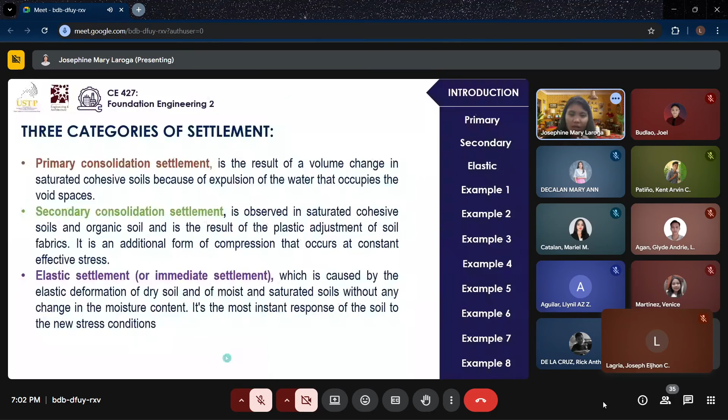Next is we have total settlement.

Naligo man ko. Ay, wala di ko napalit sampo. Sige, kanina ko... wait lang, wait. Hello? Kinsa tong gusto mo? Kaka-off mic na ako, sige lang. Naligo pati nga ay funny man eh. Padayon ta.

Anyways, so total settlement, from the term total settlement. Total, so the total na tanan settlements. So itong kaganina na mga settlements mo, it happens in different stages.

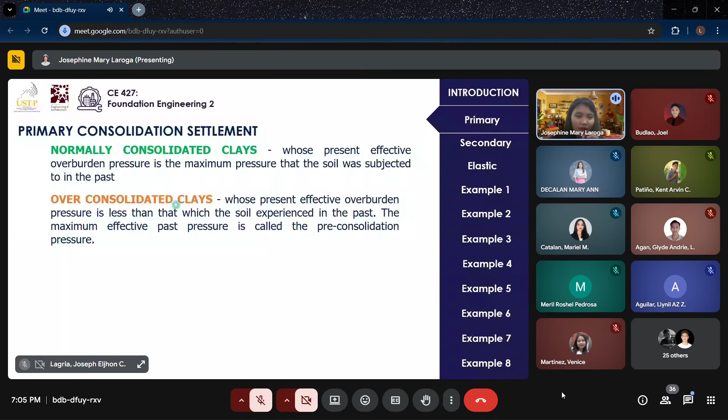Anyways, over consolidated clays. These are those that the present effective overburden pressure is less than which the soil experienced in the past. The maximum effective past pressure is called the pre-consolidation pressure.

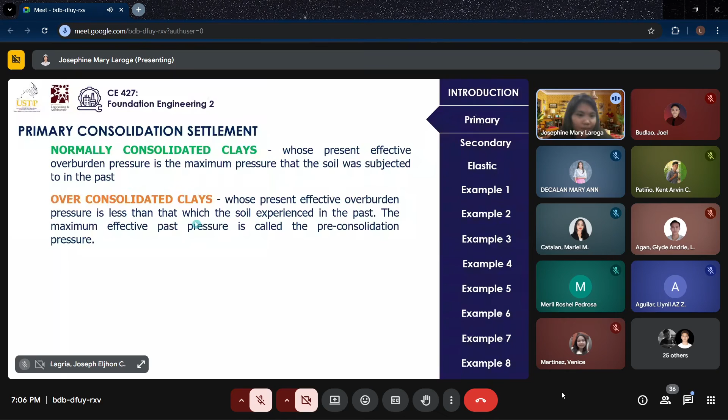So here are some examples we need to familiarize. We have CC, the compression index, and swell index - sometimes the swell index will be given, so you need to use this formula: CS is equal to 1/5 of CC. And PO gives you the overburden pressure, measured at mid-height of the clay layer, just like our previous discussions. PO will always be measured at mid-height.

Delta P is the additional pressure due to the load. PC is the pre-consolidation pressure or the maximum effective pressure. Delta E is the total change in void ratio caused by the additional load application, while the void ratio of clay before the application of the load is the initial void ratio. HC is the thickness of the clay layer.

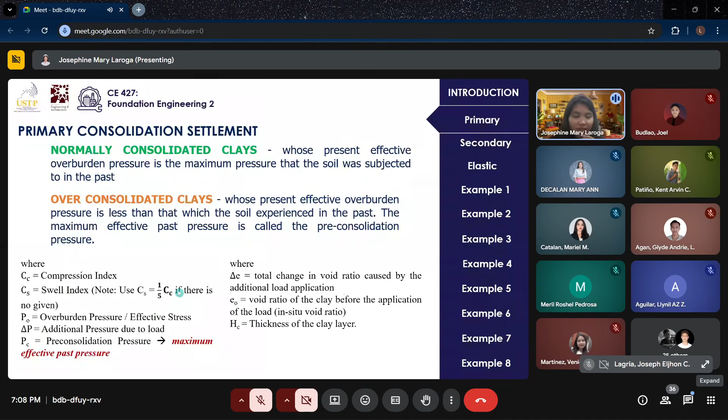This is our formula for primary consolidation settlement. For normal consolidation, we use this formula - take note, CC estimation formula is 0.009 times LL minus 10. For over-consolidation, there are two conditions: if less than the maximum pressure, or if greater than it. If less than, this is the formula you use. If greater than, this is the formula you use.

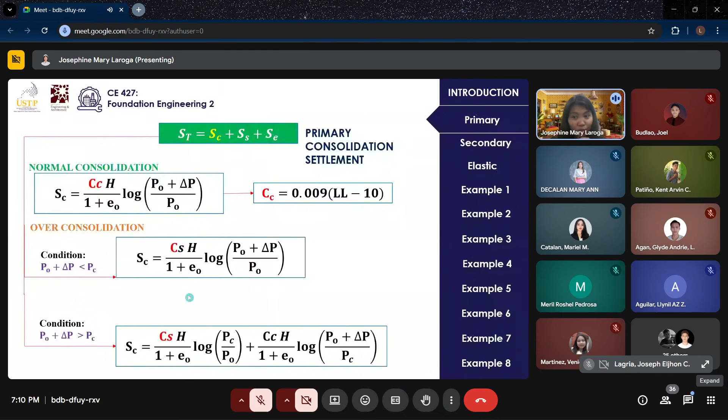Now, there are cases especially in exam questions where if CS is not given, you might have to try first if it's among the choices using 1/5 CC. If not, try another value, maybe 1/6 or 1/8, whatever works, and then recheck against the choices - that's what you're supposed to do on the boards, class. It depends on whoever made the questionnaire on which value of swelling index to use, but the most common is 1/5, so it's safest to try that minimum first, then try other values if it doesn't work.

Also take note, this over-consolidation ratio or OCR is just PC over PO. So there will be times when PO or PC is not given, but OCR will be given instead. So that's how you solve it.

If we solve further - we also apply the 2:1 method if applicable. This is for solving the additional pressure. There will also be times when the additional pressure is not given, but the load at the top is given, so you need to solve it yourself. It depends on which areas you're focusing on - take some time with that later.

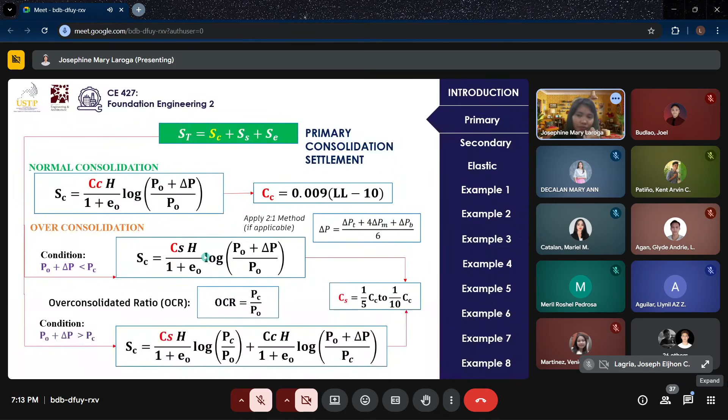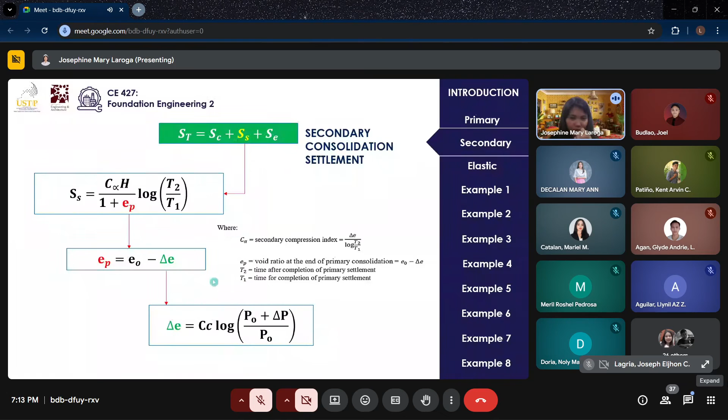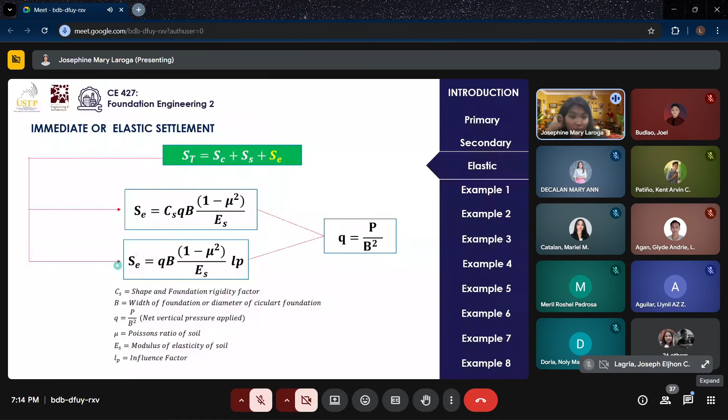For elastic settlement, this is the formula - that's Cs times Q, where Q is your pressure, equal to force over area. CS is actually the shape and foundation rigidity factor. Then we have the width of the foundation - use the diameter if it's a circular foundation, or the side length if square. Then mu is the Poisson's ratio, E is the modulus of elasticity, and there's the influence factor, which is usually given.

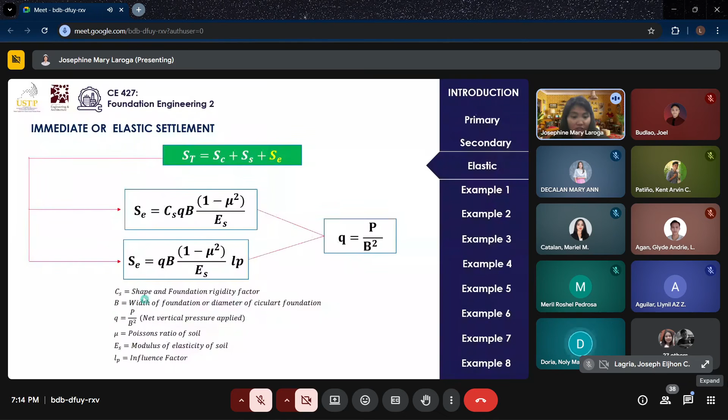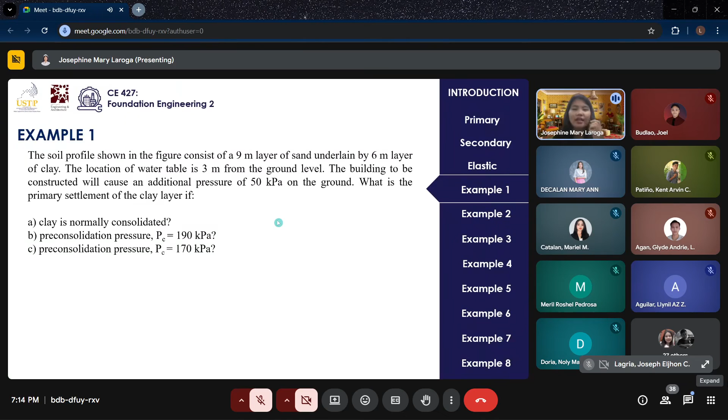For example one, the soil profile shown in the figure consists of 9 meters of sand, underlain by 6 meters of clay, and below that is clay.

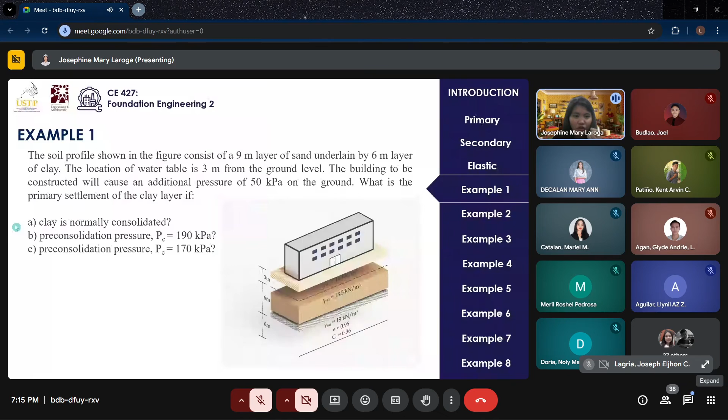The clay is normally consolidated, so we use this formula for normally consolidated clay. But first things first, we need to solve for our overburden pressure.

To solve for the overburden pressure, that is just your unit weight times the height. Since this is a saturated portion, we proceed directly to this.

Look at the line, here 3 meters is the water table from the ground. Since this part is saturated, we account for water pressure. The total stress includes the water pressure. That is just 16 times 3, okay.

Plus 18.5 times 6, plus 19 times 3, which gives the mid-height of the clay. Do not forget this one because usually students make mistakes here. This is a common mistake, so I hope you won't make the same mistake.

So that is 3 meters. Then you deduct the pore water pressure, which is the unit weight of water times the total height of the water table, which is 6 plus 3. That gives you your overburden pressure.

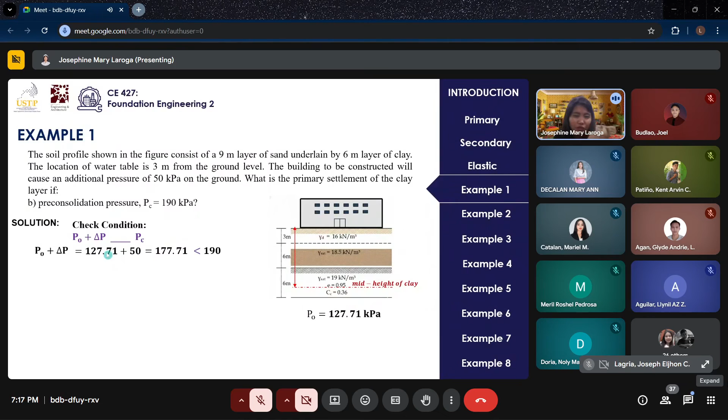Now, what if the pre-consolidation pressure is 190 kPa? First things first, you need to check if it is greater than or less than. So we resolve the overburden pressure plus the additional pressure, and that is 177, which is less than 190. Meaning, our solution is this one.

So we will use this formula. Take note, we were not given the value of CS, so we need to solve for that. We use the formula, and that is 1/5 of your compression index.

So that is 31.79. Also, I would like to add, if the input height here is in meters, the answer will be in meters. Since our input here is in millimeters, our final answer will be in millimeters. So it depends on what the input unit is.

Now for pre-consolidation of 170, this total of 177.71 is greater, so we use the upper equation. We substitute, given that we now have all the values. We find the answer would be 48.86.

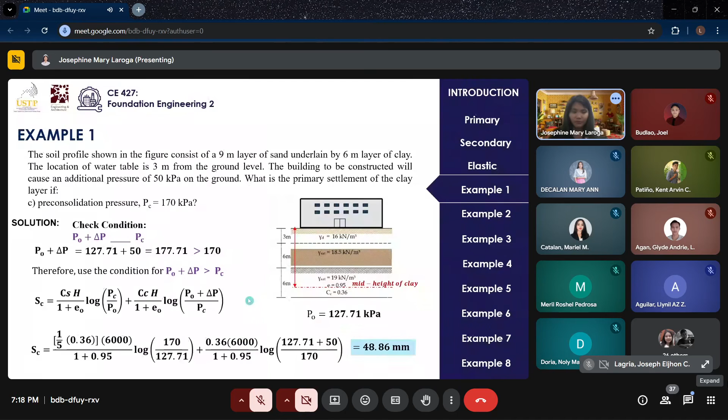I would like to have someone else read example number 2. Let's have Juliana. Hello, Juliana is not here. It's not okay to just disappear without attending face-to-face classes when called on.

Alright, since she's not here, let's have someone else read example number 2. A 2-meter clay layer has a void ratio of 0.92, a specific gravity of 2.72, and a liquid limit of 40%. Above the clay is a 3-meter thick layer of sand with a void ratio of 0.50 and specific gravity of 2.62. The water table is located 1.6 meters below the ground surface, and a 3-meter thick backfill is placed on the ground surface with a unit weight of 17.3 kilonewton per meter cube.

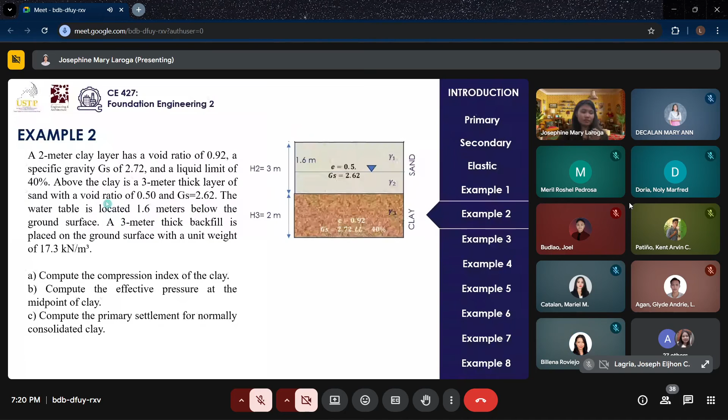Compute the compression index of the clay. Second, compute the effective pressure at the midpoint of clay. And third, compute the primary settlement for normally consolidated clay. Okay, thank you, Robbie Joy.

So first, to compute the compression index, we will just use this formula. Come on, let's go.

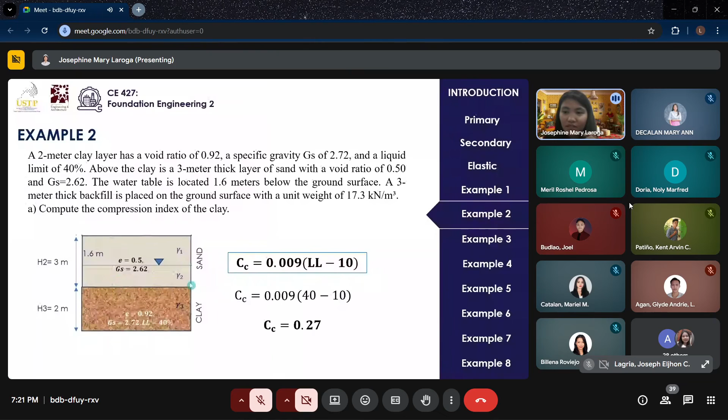Now for letter B, the effective pressure at the midpoint of clay, that is your P naught, right? So first we solve for the unit weights here.

The unit weight of the sand, the saturated unit weight of the sand, and also the saturated unit weight of the clay. Since we now have all the unit weights, we can solve for our effective stress at the midpoint, which is our P naught.

Now for letter C, compute the primary settlement for normally consolidated clay. We will be using this formula since we have all the values needed. All we have to do is input this into our calculator, and the final answer is 85.71.

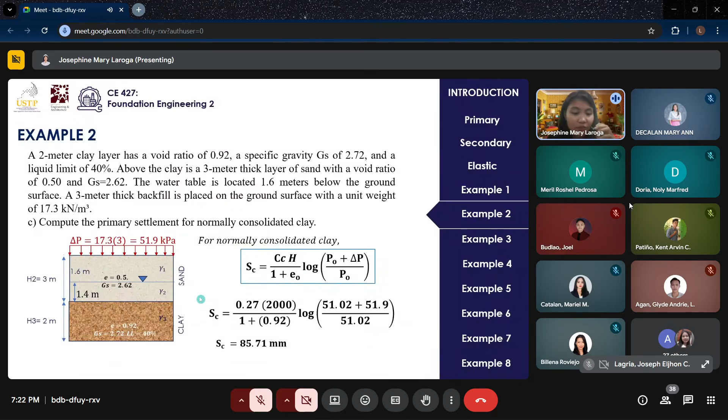Okay, so for example number 3, let's have Annagel Aparece. Is Annagel Aparece present? Yes, ma'am. Good. Okay, thank you.

A 3 meter square footing is constructed over a loose sand layer, carrying a total load of 710 kN. Compute the elastic settlement of the footing given Poisson's ratio of 0.32, modulus of elasticity of soil as 16,000 kPa, and an influence factor of 0.88. Also compute the primary consolidation settlement of the normally consolidated clay layer, and the total consolidated settlement of the clay 5 years after completion of the primary consolidation settlement, given the time for primary settlement is 2 years.

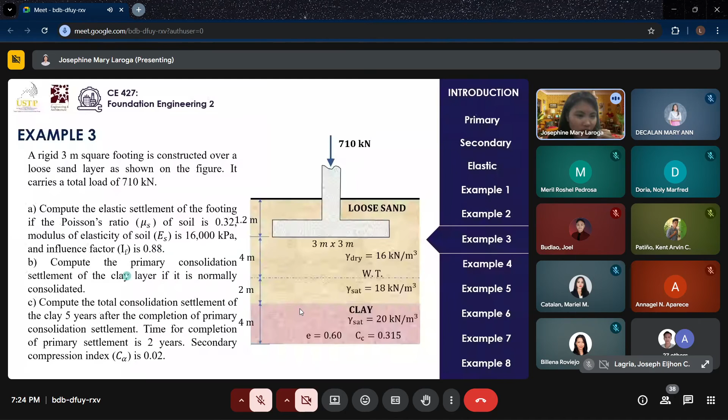Again, this conditional problem belongs to elastic settlement. We have a formula for direct substitution. Since the Poisson's ratio, modulus of elasticity, and Q are given, we need to solve this.

First, Q is equal to pressure, which is force over area. That's the direct substitution here. So that's 710 over the area of 3. Class, please take note of the units—your units should coincide.

One way to check is if the units cancel out. You might wonder why 3,000 is in mm while others are in kN and meters. 710 over 3 squared gives kPa, and since our ES is in kPa, it cancels out, leaving 3,000 in millimeters. That is the dimension of our square footing in meters, so the final answer is in millimeters.

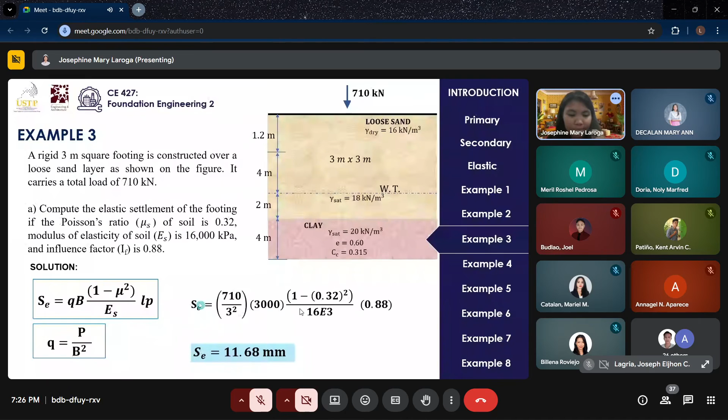Now for the primary consolidation, first we need the value for primary consolidated settlement, and the formula requires delta P. But delta P wasn't given directly—only the force was given—so we need to solve for our additional pressure.

What method are we going to use? The 2:1 method. So let's focus on the clay area. PT is the top, PM is the middle, and PB is the bottom.

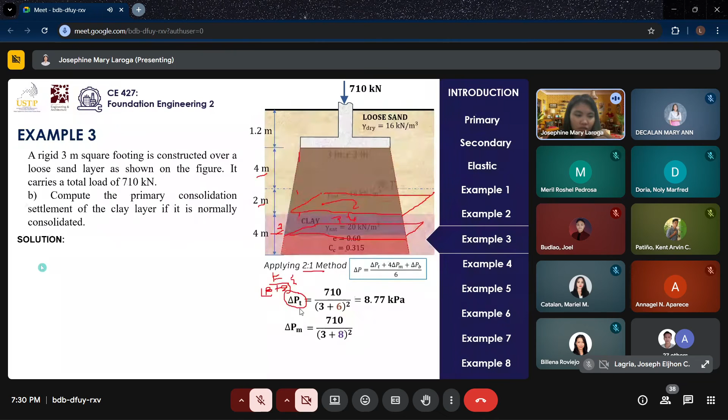Using the 2:1 method, that's just force over (L plus Z) squared, since this is a square footing. Then we get 5.87. Now for PB, we get 4.20. Substitute these into our original equation—our additional pressure is 6.08.

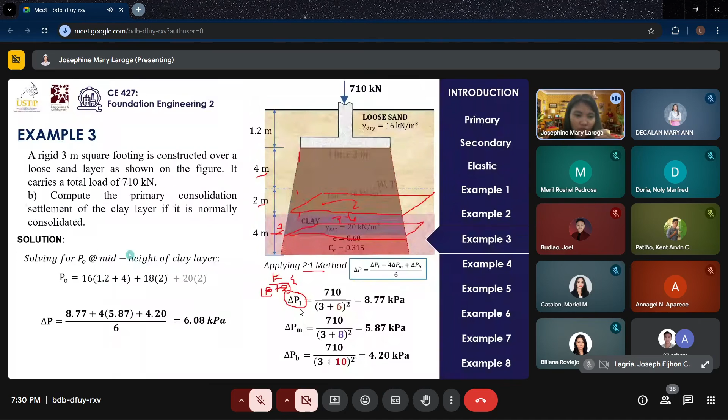Now we can finally solve for our P0, which is equal to 119.96. Now we have the values for P0 and delta P, so substitute back into our original equation. Our final answer is 16.91.

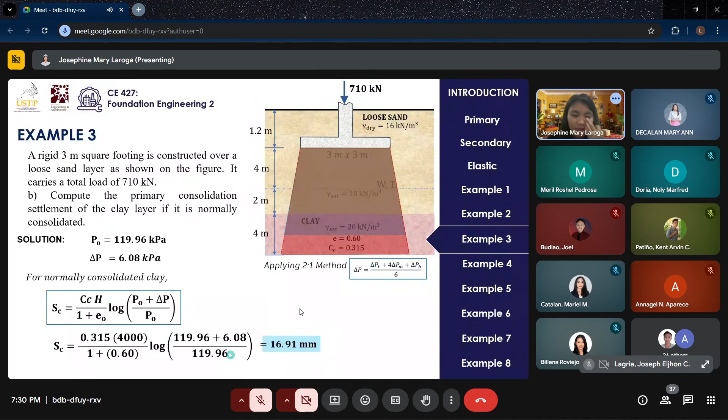Now for letter C, we are given the total consolidation settlement. So for total consolidation settlement, we already have primary and elastic, but we're missing secondary. So we need to solve for secondary settlement first.

So this is the formula, you have C alpha. Luckily for us, the secondary compression index is already given, which is 0.02. Now for EP, we still need to solve it, but delta E wasn't given either, so we need to solve that too. That is equal to the compression index times the logarithm of the pressures, and that equals 6.764 times 10 to the power of negative 3.

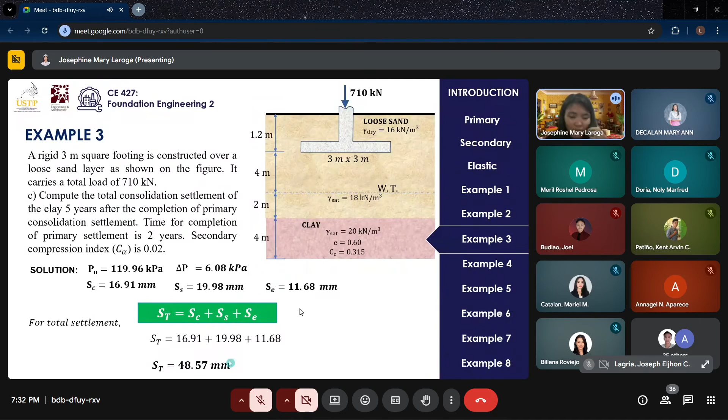Then we go back to our original equation and substitute it here—that is your EP. Then finally, since we have all values, we substitute to get our final answer. The total settlement requires adding SC, SS, and SE. We have a total settlement of 48.57 millimeters.

And then, for example, can we have, Mr...

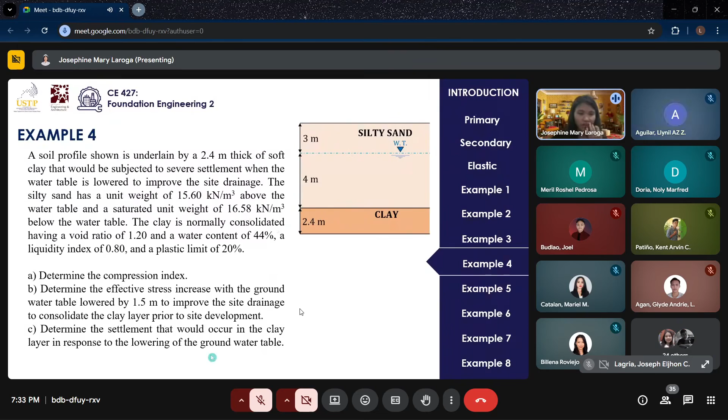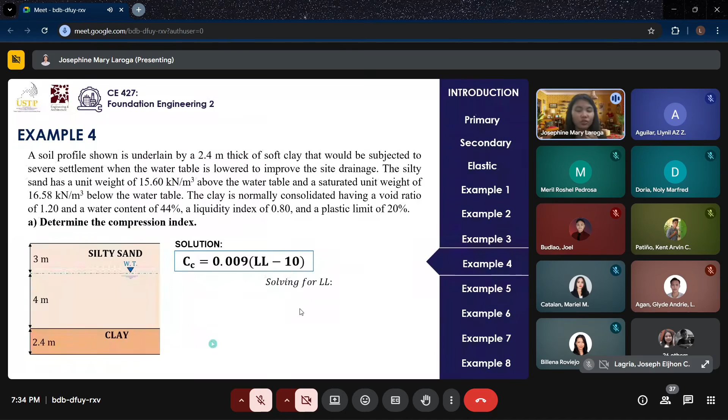You can make your own mnemonics to make it memorable. Anyway, you substitute your liquidity index, your plastic limit, and your moisture content.

If you solve, you get 50. Substitute 50 into our compression index formula. So the compression index is equal to 0.36.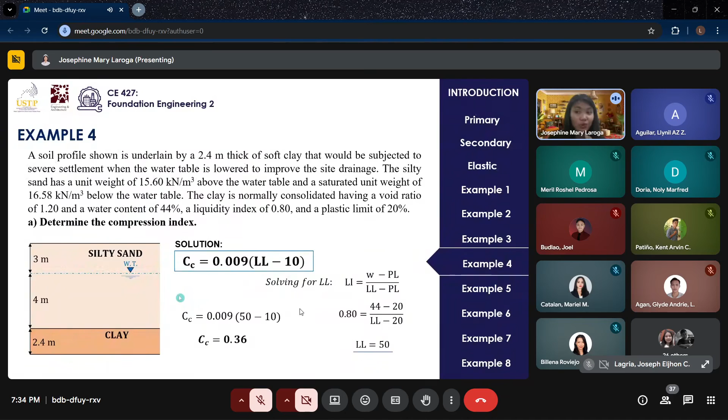Now for the effective stress increase, how will we solve that one? First, let's get the saturated unit weight of the clay layer.

Once you have that, we also need the specific gravity, GS. So substitute into the saturated unit weight equation with S equal to 1 since it's saturated, void ratio of 1.20, and water content of 0.44.

So GS is equal to 2.73. With the specific gravity, we go to the equation for our saturated unit weight and substitute all the values. You get 17.52.

So now we have complete unit weights for our soil. Now for condition 1, we need to get the effective stress, because what we need is the effective stress increase.

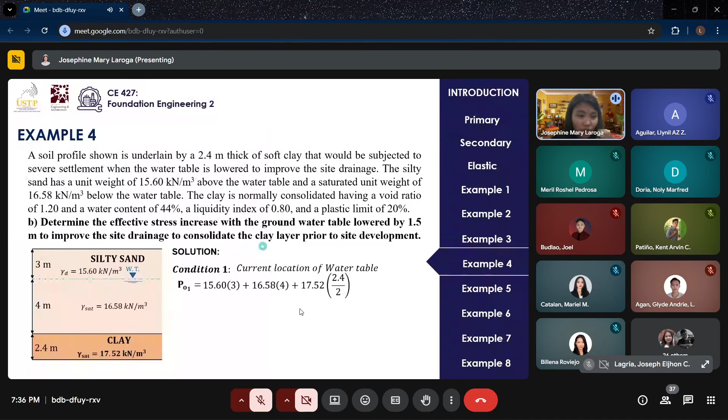First is the effective stress at the current water table location, which is 3 meters below the surface. That is condition 1.

That gives us 83.132. Condition 2 is when the water table is lowered by 1.5 meters.

So that is 1.5 meters. So the sand becomes dry for that 1.5 meters, and the saturated portion is for the next 2.5 meters. So going back to our solution, which is unit weight times height minus the pore pressure, we get 96.377.

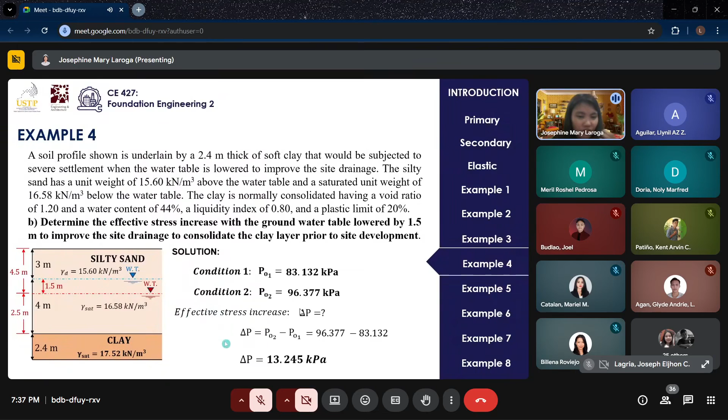So after this, how do we get the effective stress increase? We just need to deduct, right? So we subtract condition 1 from condition 2. So the increase is 13.245, and that is the answer.

And then for letter C, determine the settlement that would occur in the clay layer in response to lowering the water table.

So for a normally consolidated soil, this is our formula. Our answer for this one is 25.20.

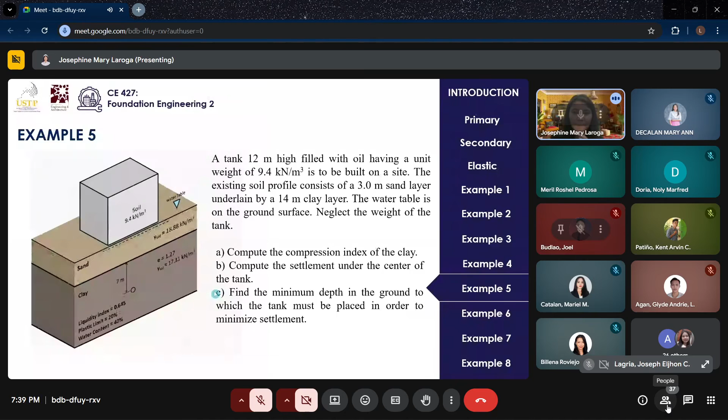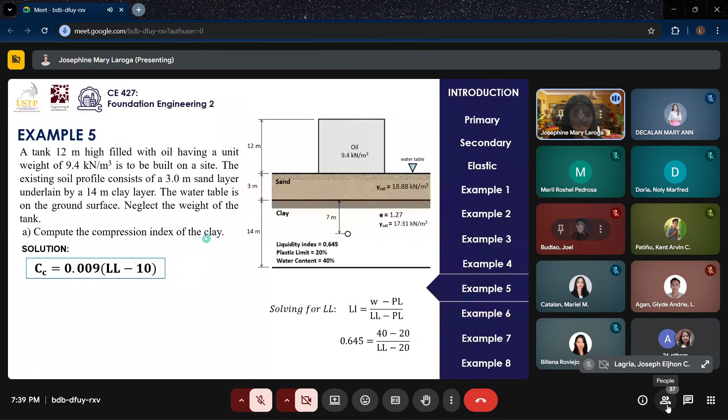This time, the liquid limit is not given directly. But we have the liquidity index and plastic limit, and the water content, so we can solve for our liquid limit.

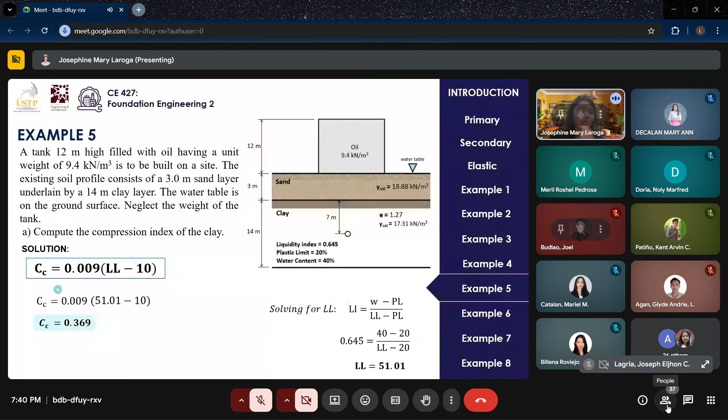The equation is LI equals W minus PL over LL minus PL, so we can solve for our liquid limit, and that is equal to 51.01. So our compression index is 0.369.

Next we will solve for the effective stress. That is the total pressure minus the pore pressure. Unit weight times the height, minus the pore pressure. Take note, mid height of the clay, so that's 7 meters.

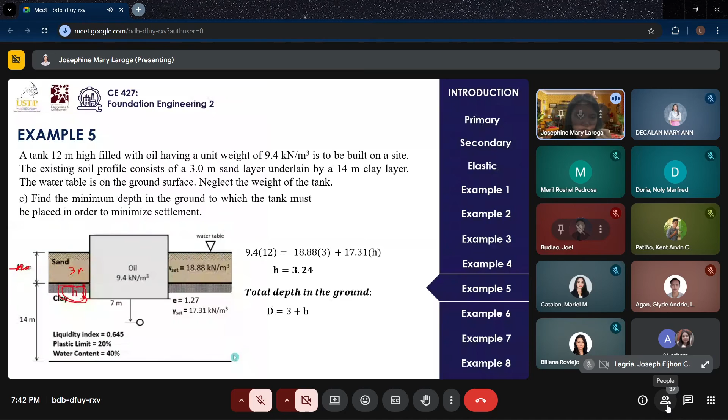And we are down to our last sample example. So we have here compression index, basic, compression index.

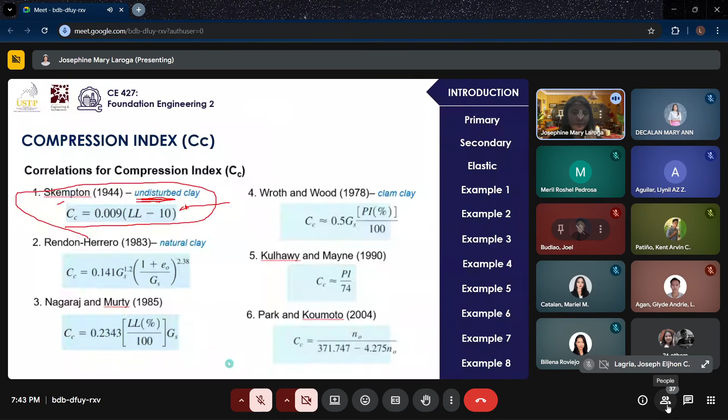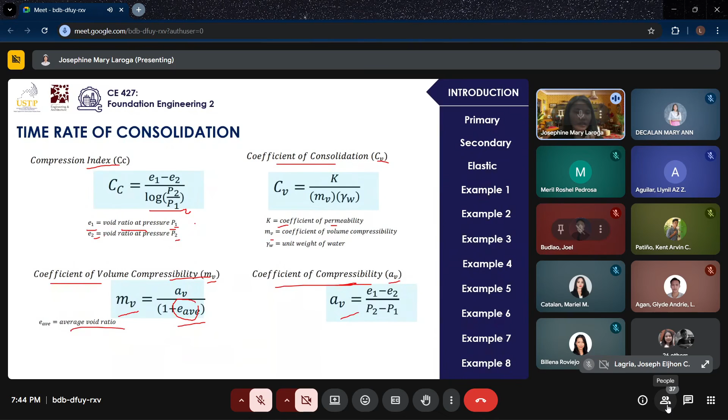So for compression index, this is the formula. Coefficient of consolidation, you remember? Coefficient of volume compressibility, and coefficient of compressibility AV. And take note, EAV is just the average void ratio. E1 is void ratio based on initial pressure or P1, and E2 is void ratio at P2. K is the coefficient of permeability, and YW is the unit weight of water.

Now, time factor, this is the formula. Take note, HDR depends on whether it is drained on both sides or drained on one side only, since it's possible to drain on both sides. For example, drain, this one is sand. This one is sand. Our sand, doesn't it drain the water there? Meaning it drains on both sides.

But what if this one is rock? Our rock, does it drain the water below, below it? Does it drain the water below? So it drains only on one side. So if it drains on both sides, it should be divided by 2. But if drained on one side, it's over 1.

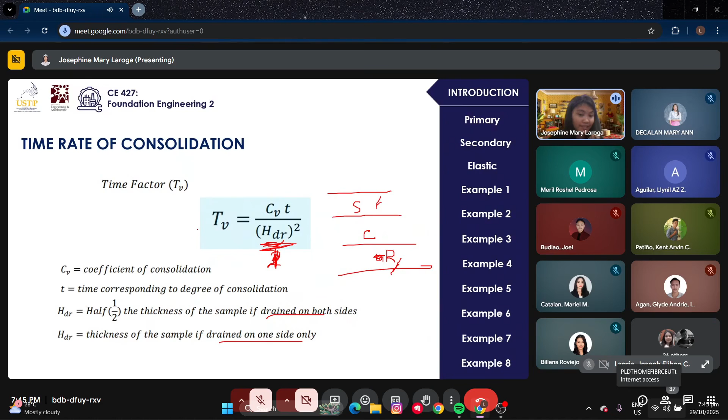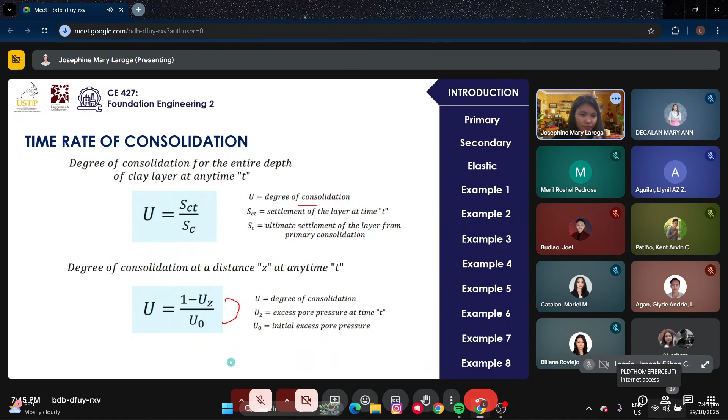So this is the degree of saturation, degree of consolidation, then another formula. This is the relation of your time and degree of consolidation. So that is T1 over T2 equal to U1 squared over U2 squared.

And then you also have a formula for your time factor. The time factor depends on your degree of consolidation. So if 0 to 60, you will use the formula TV equal to pi over 4 times U over 100 squared. If greater than 60, you will use this formula. Now there might be cases in other references with a table.

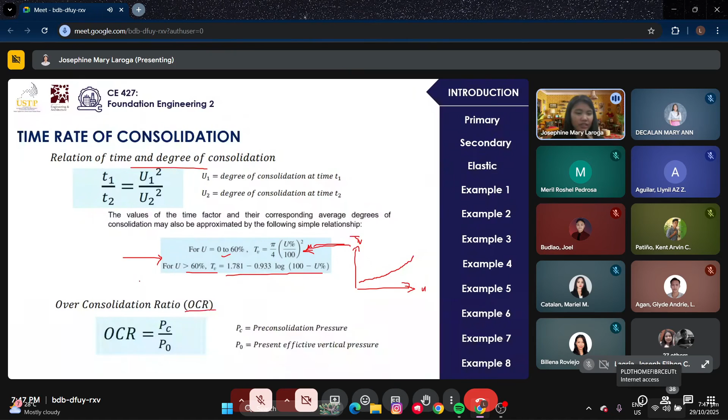Now for over consolidation ratio, if given, that is just equal to PC over P0. So for example 6, this is what we are solving for, the compression index, coefficient of compressibility, void ratio. It's given, E1, E2, P1, P2, so we have no other variables to solve. We go straight to substituting into our formula.

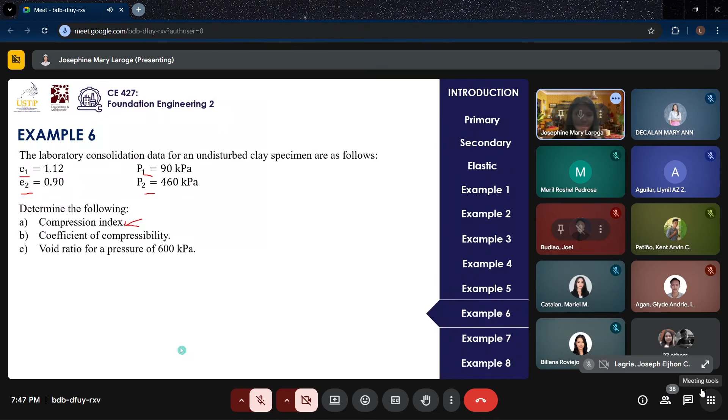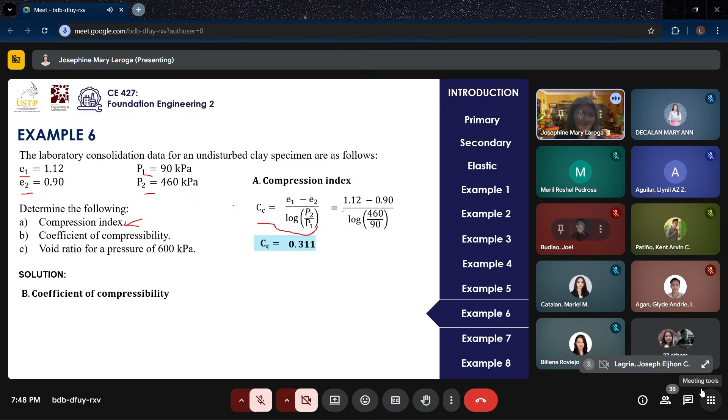This compression index has a different formula. No given liquid limit, you cannot use LL-10 approach since it's not given directly. So we use the given values of our void ratio and pressure, and we get 0.311.

For coefficient of compressibility, that is your AV, so that's E1 minus E2 over P2 minus P1, that is 5.946 times 10 to the power of negative 4, squared over kN.

Then void ratio if your pressure is equal to 600 kPa. That is the formula, this is CC. The pressure changes, it's now 600. Since it's 600, this means E2 changes, and E2 is the void ratio we're solving for.

So we use the same formula, but what's different is P2. Okay, the compression index stays as is, plus. Same soil. So that is equal to 0.864.

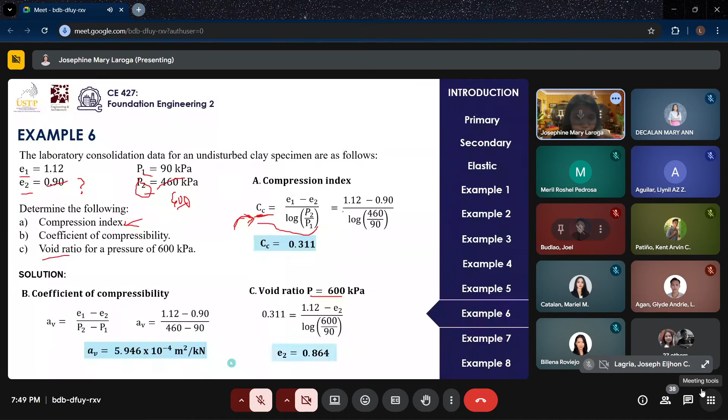For example 7: here it's coefficient of compressibility, coefficient of consolidation, for a sample drained on both sides, and then hydraulic conductivity.

Volume compressibility is a direct formula, so that's easy. We want the average of your void pressure, no, average of your void ratio right there. And that is equal to... before we solve for MV, we solve first for AV.

So AV is equal to 0.92 minus 0.78 over P2 minus P1. And then since we have our value for AV, we can substitute it into our original equation, that is 1 plus E1 plus E2 over 2, that's your average. And that is your coefficient of volume compressibility, 1.081.

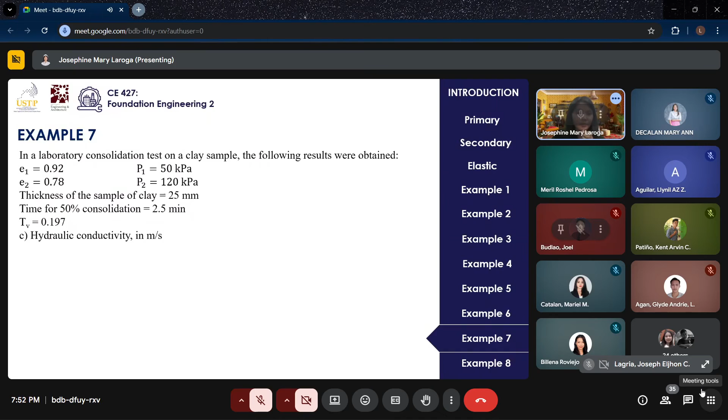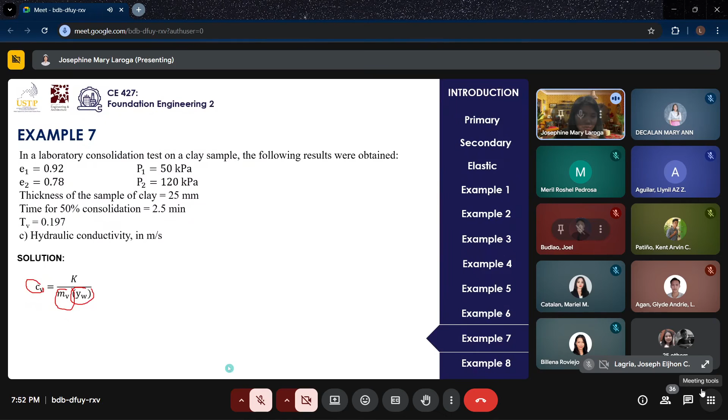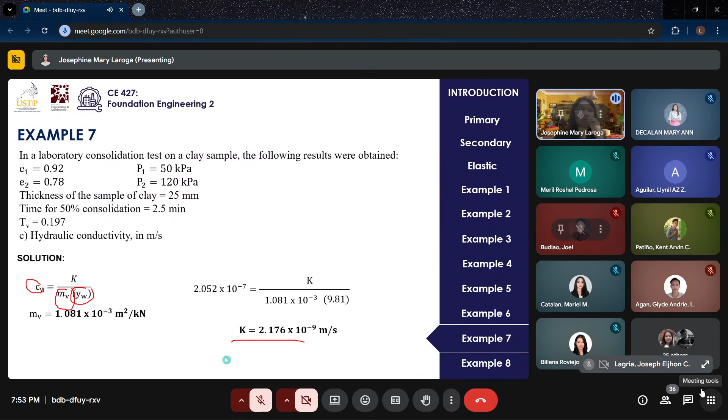Now for hydraulic conductivity, all we have to do is choose the formula: CV is equal to K over MV times gamma W. Since we already solved CV, then we solve MV. So unit weight of water is 9.81 - oops, MV. And then our hydraulic conductivity is equal to 2.176 times 10 to the power of negative 9.

Now we are down to our last example. I would like to ask Miss Ariano to please read example 8. Ariana... Kaufman, Kaufman... she's not here. I'll be calling another person, Joseph Lagria. Yes, ma'am.

Consider the soil profile shown in the following figure. The soil is subjected to a uniformly distributed load, delta P, 31.1 kilonewton per square meter on the ground surface. The sand has dry unit weight YD equal to 16.5 kilonewton per cubic meter, and saturated unit weight of sand equal to 19.3 kilonewton per cubic meter. The underlying clay has a saturated unit weight of 20.5 kilonewton per cubic meter, liquid limit equal to 38, E sub 0 equal to 0.89, and C sub S equal to 0.25 CC. Depths H1, H2, and H3 are as shown.

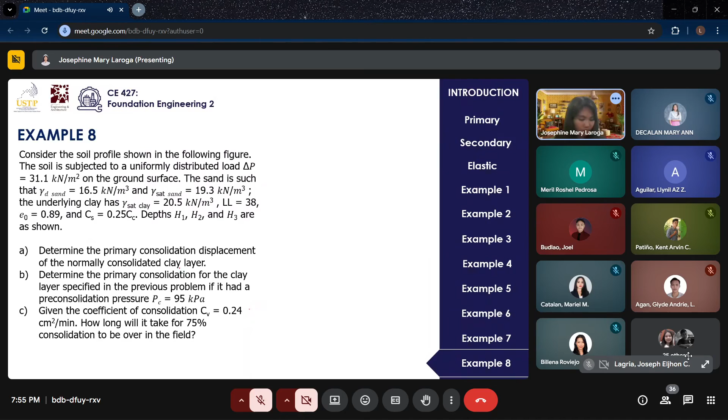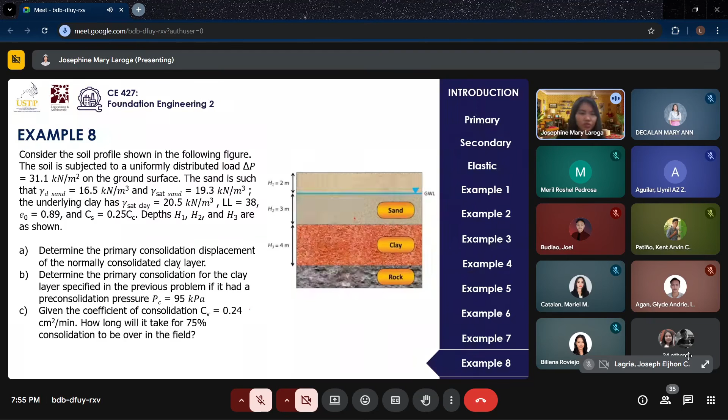Okay, thank you Joseph. So this is a diagram of the problem. First, we're going to look at primary consolidation. Given the normally consolidated clay, first things first we solve for our compression index, that is 0.009 times LL minus 10, and that is equal to 0.252.

Then for your overburden pressure at the mid-height of your clay - again, mid-height of your clay, not the top - that is equal to 82.85. Since it's normally consolidated, our formula is SC equal to CC times H over 1 plus E, logarithm of your pressures. Then you substitute all the values, you get 73.82 millimeters.

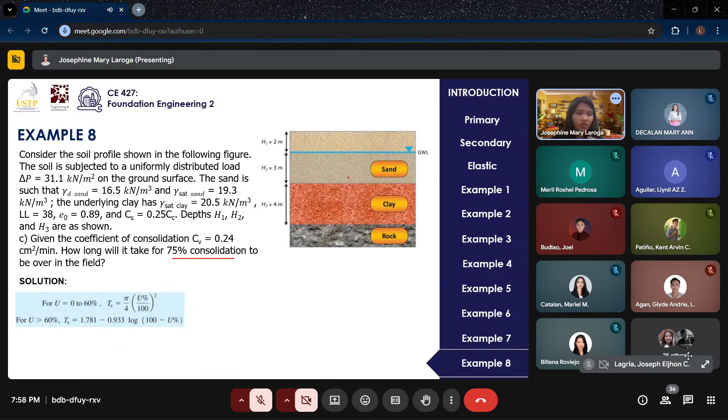Now for the last question: given coefficient of consolidation is 0.24, how long will it take for 75% of consolidation to reach the field? So this 75% is your degree of consolidation. The formula for this is CV to HDR.

So before that, solve for the time factor. Since 75% is greater than 60, we use this formula. So our time factor is equal to 0.477.

That's okay. So with the time factor, our CV is 0.24, but there's no dimension yet. You can answer in days, minutes, hours - you can choose whatever unit you like, but days is good since the value gets quite high. You could also convert it to years. So it depends on your preference for the unit - that's our time.

And then our HDR, that is the height of our clay, which is 4 meters. But take note, if HDR is drained on both sides, you should divide by 2. But since it's drained on one side only - your clay is drained but your rock isn't - meaning it's over 1. So it's 4,000, and the answer is 221 days.

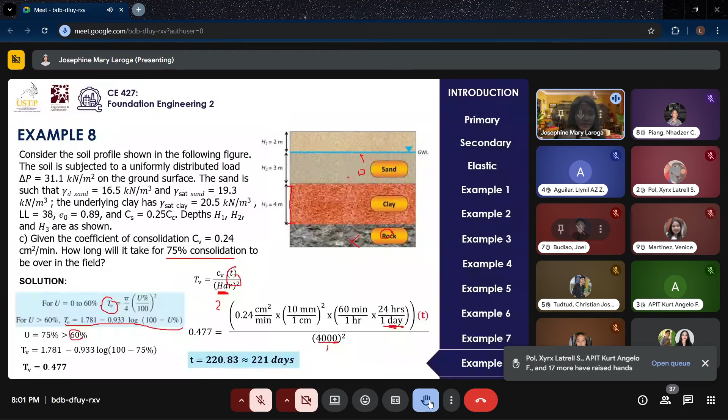The next topic is about what appears in the boards. This settlement topic has come up repeatedly in the boards - many times. So to give you an overview.